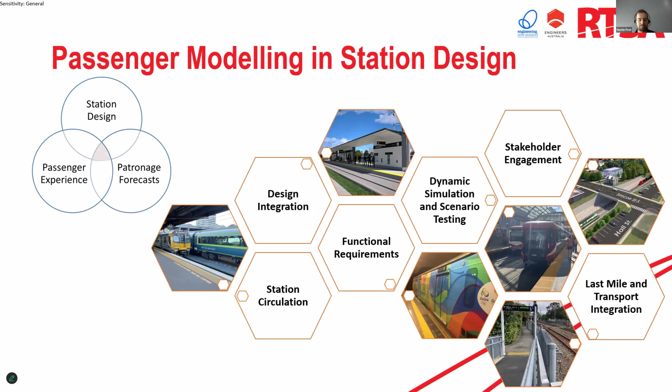Our approach to station modelling is typically around understanding the population and the user groups - developing the demands and understanding the pedestrian flows. Who's using the station? How many people are there? What are the peak times and where do they come from - walking, cycling, park and ride, and other public transport services?

An analysis in the early stages is normally used to size key internal and external elements and space-proof the design. As we increase the level of analysis, we can develop simulation models which demonstrate visually the movement through the station, circulation, and interfaces with the surrounding area.

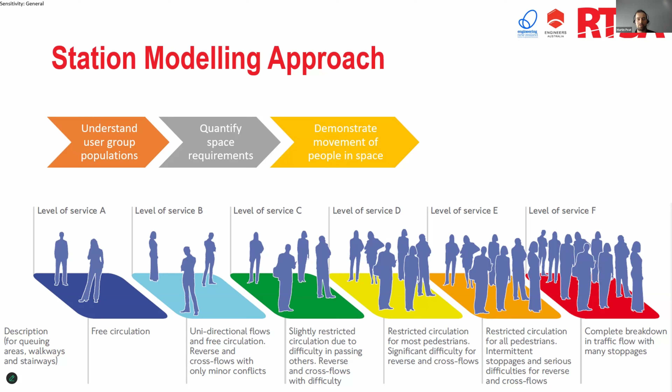Through the various levels of service, at a project level, technical requirements are specified in terms of level of service for each portion of station infrastructure, and this dictates or influences the passenger experience and safety. A caveat here is that levels of service requirements are often calculated in terms of passengers per minute, and particularly with lower train frequency, how this minute is defined can be open to interpretation. That's been one of the key findings through a number of projects.

Analysis is focused around key station elements that have a direct impact on the customer journey, and criteria for each component, and then the combination of these lead to the individual customer experience.

Scope and technical requirements for these are covered through technical guidance and station modelling parameters. For example, in Auckland, the Transport Design Manual includes technical requirements for station infrastructure, and internationally, London Underground led the way in developing standards, with most jurisdictions having some form of guideline.

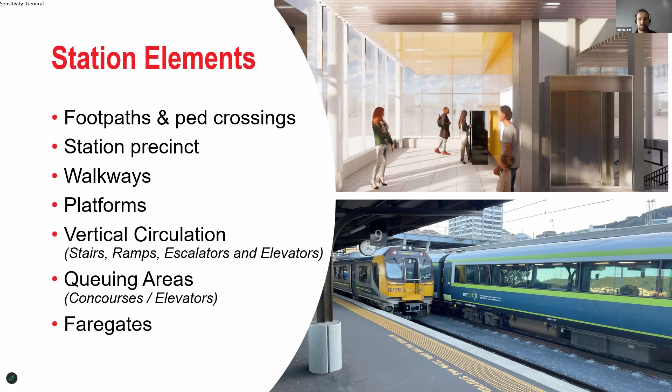I've got three case studies today, and the first is for a light rail station under the road corridor. Here a constrained footprint led to multiple iterations of the vertical transport layout with an objective of understanding how the station performance varied in each, and the connectivity between ground level and the platform for all the users, including those with mobility needs.

So here two different options are presented, option 1 on the top and option 2 below, with different escalator configurations for each alongside the set of stairs below. Each of these has had a different operational impact, including on the platform utilization and how people were distributed.

At the street level, we needed to understand the walking catchments of the station entrances and the locations of the bus services, as this dictated the movements down into the station.

What we found for the top option was that it had the longest distance travelled from platform level to the south entrance, and this was in part due to the orientation of the escalators, creating a 180 turn at both the platform level and the concourse level for all the users using those escalators.

The second option had the shortest distance travelled, because of the orientation of the escalators, but this also meant that at platform level, operational flexibility was limited, given the proximity of the escalators to the entrance, and also, down on the bottom right, the proximity of the base of the escalators to the lift bank behind.

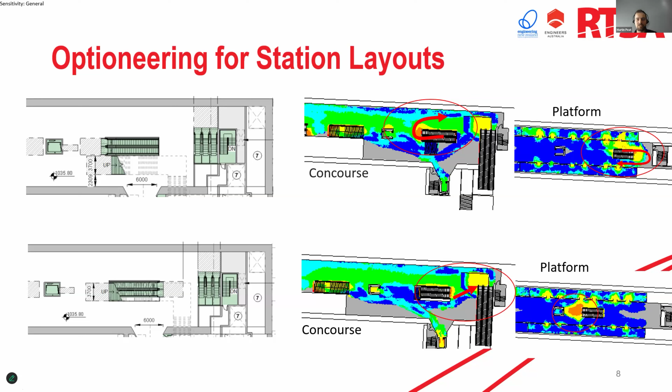Across all the levels, we wanted to understand the difference in access to the platform between lifts, stairs, and escalators. This work demonstrated the criticality of maintaining runoff areas at each of the levels around the vertical transport.

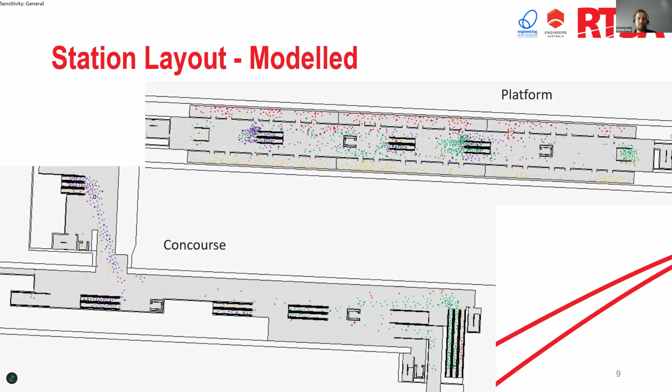Through the work, we developed a simulation model of the station, and so the next slide has a video that moves through the platform to concourse and then street level.

The simulation model captures all levels of the station as people move from the platform up the escalators, through the concourse, and out into the entrances, and likewise, people moving the other direction from street level down to the platforms.

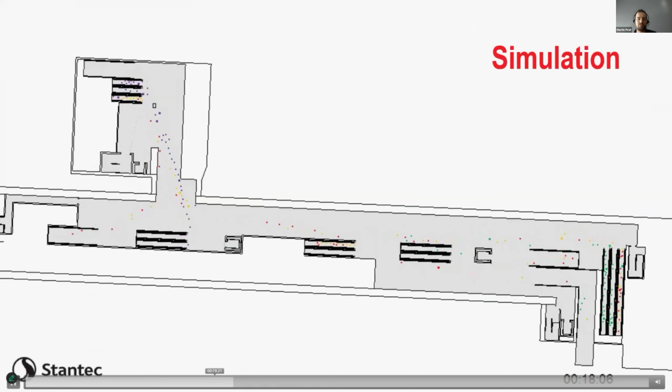Here we're able to observe and quantify the queuing at the escalators, platform clearance times, and cross flows of desire lines, and the relationship between the elements within the station.

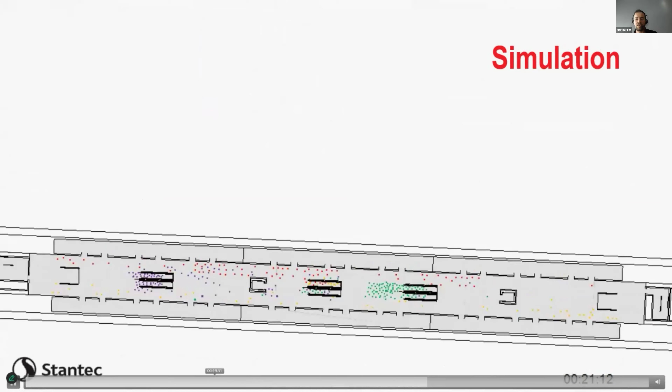The model provided a useful tool that was used to compare and contrast different options as the design detail evolved, with the aim of reducing costs for the infrastructure while enhancing the customer experience.

The next case study I've got comes from overseas in Canada, and just south of Toronto is Oakville Station. This station has a daily patronage of about 14,000 people, and it's a commuter station to the southwest of Toronto.

What we're looking at here was demonstrating the local station planning guidelines and the pedestrian modelling guidelines, which we were involved in developing. Here we were looking at the redevelopment of the interior of the station and incorporating an ancillary tenant, a cafe with significant pedestrian activity.

From the outside of the station, it was important to understand the mode split, be it the park and ride demand, public transport transfers to the bus station on site, walking and cycling connections. The current conditions had about 80% of passengers entering from the main entrance and 20% coming from the bus terminal, and this came from the mode split at the station.

We were looking at changes to the concourse area and adjusting the number and the location of the entrances inside to redevelop that space.

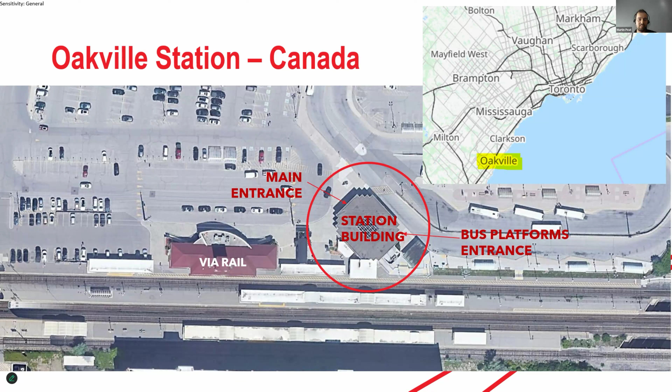We were also able to project this forward to 2040, which was our design year, with an 80% ridership growth forecast.

Typically, through a lot of the station guidance, we would be looking at the AM peak and then taking an inverse for the PM peak. However, in many cases, and this is one of the lessons learnt here, the morning peak is primarily boarding, whereas the PM peak is more spread and has a higher mix of boarding and alighting. In this case, the PM peak generated higher two-way movements.

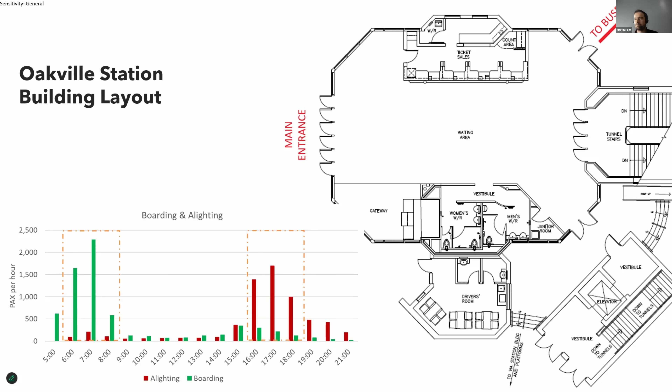Through the redevelopment work, we wanted to look at closing the entrance out to the bus terminal and putting everyone through the main entrance of the building. So here we were looking to rework the internal space and reprogram that top space for a cafe function.

In order to do this, we needed to quantify the passenger levels of service through the area and calculate the corridor width that would be needed through the station building to keep as clear space.

One of the things that we found, looking at the boarding and alighting demands shown in the graph, is how dominant the alighting demands in red are and how peaky they are after the train arrival. This meant that on average demand is low, but there's high peaks with two-directional flow occurring, as there's low levels of boarding but a big alighting load.

The variable levels of service here highlight the importance of defining the minimum requirements for levels of service: how it's calculated, the time period, and how lengths of time with no passengers are treated. The peak minute looks at those key alighting periods, whereas the average minute is spread over a 15-minute period, really emphasizing the different metrics and different ways of interpreting levels of service.

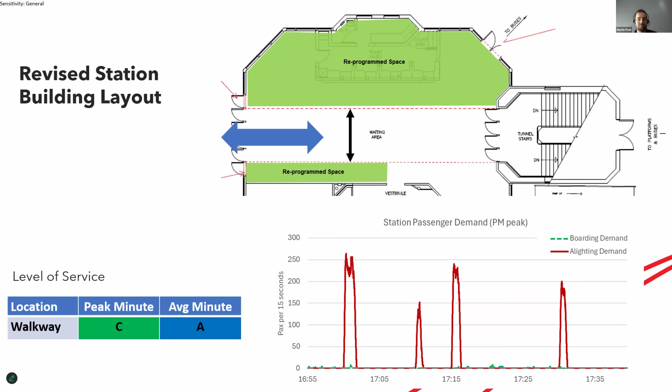A secondary task was to assess the food and beverage offering and identify how much space was needed for queuing there. Combining that with the clear width needed through the station allowed us to influence the design.

So this example demonstrates the need for localized data to inform the analysis and an understanding of train service patterns and future growth. And then we're able to develop a plan of how to maximize the internal footprint.

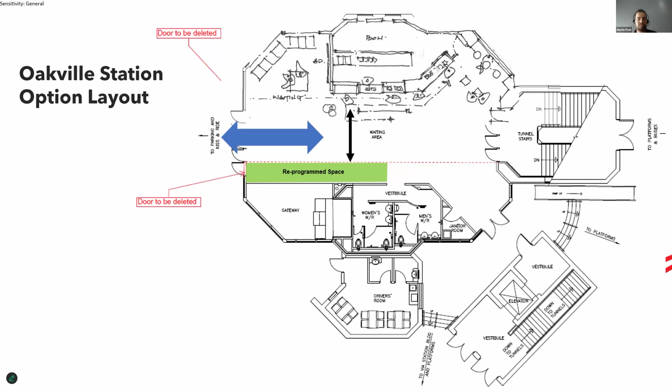My third case study is taken from Brazil, at Deodoro Olympic Park, located on the main rail line outside Rio, where a series of venues were co-located. The main access to this series of venues was through a single rail station.

The key part of getting people away at the end of the day back to the train station was egress, often with events having finish times that coincided. So that's a large number of people to get away to the station and out back to the city centre.

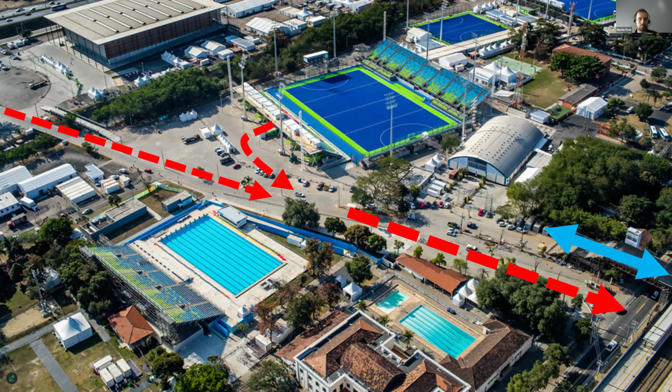Vila Militar Station has a side platform and an island platform. With the city-bound platform being on the northern side, we're able to facilitate direct access onto the platform from the venues located to the north.

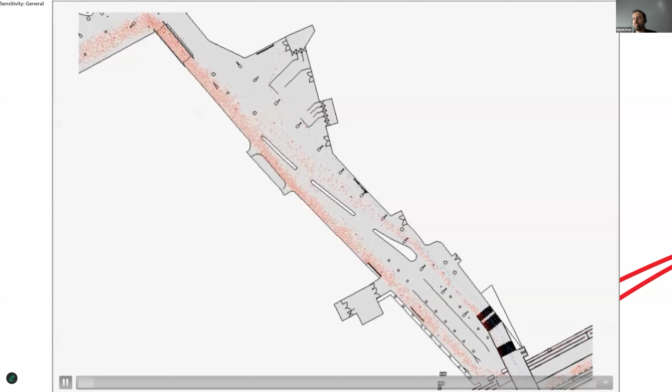Through the planning and operational phases, we're able to firstly make a plan and crowd model the people leaving the venue, with the dots representing individual people moving.

Here we needed to understand the station demands from the venues and also the station operations. This included the line loading to understand available capacity that would come through on each individual train. From here, we were able to work out how to load the platform within the headways between trains.

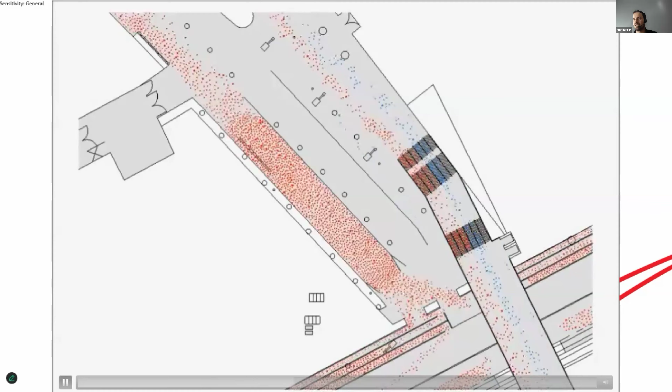This included access to the platform and staging of spectators using holding pens to match the capacity.

These simulations were essential in the stakeholder engagement that we needed to do, with the local landowner, local councils, and the rail operator.

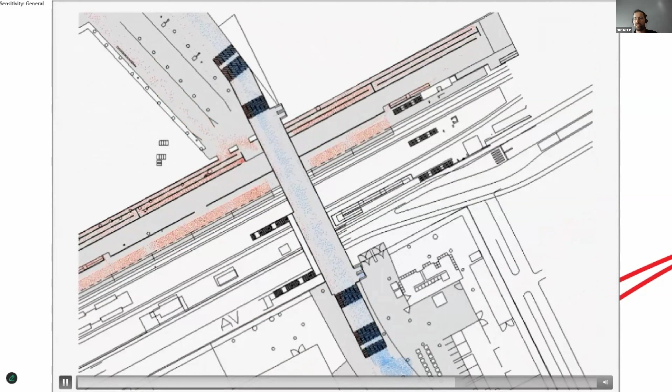And the tools that we developed and presented, we used to help train the venue teams in how the operation would work.

One of the neat things about this was seeing it live and in operation, and the success of the system and the plan that was developed through the crowd modeling and design of the station operations. Here we see videos of people being held in pens and then released through as trains arrive and capacity becomes available on the platform.

And this operation repeated night after night during the period of the games.

Through this work, a number of lessons were learnt, primarily the importance of local calibration of the parameters, acknowledging that not all stations perform the same, needing to look at the nuances and individual station-specific inputs, such as boarding or alighting platforms and how people spread along the platform. At existing stations, the splits between ramps, stairs, and lifts can differ depending on the demographic of the users, the number and location of station access points, train stop location along the platform, and the location of access modules compared to other parts of the station precinct, and where the last mile routes come in and the different modes.

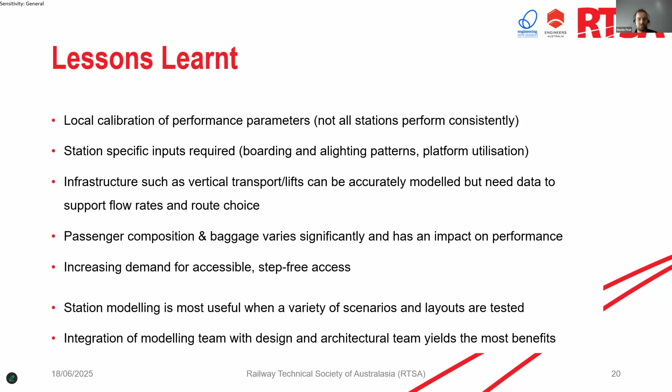Thanks, Martin. That was a great presentation. I am Louise, a Senior Landscape Architect and Crime Prevention through Environmental Design Practitioner.

I've recently completed assessments on urban design projects, bus terminals, and a railway station upgrade. So what is CPTED? Problem seeking before problem solving. CPTED covers a wide range of crime prevention strategies. The following presentation will focus on station design and the transitional environment to railway stations.

When undertaking a station assessment, four main questions should be asked. What are the assets, persons, places, information or property that require security protection? What are the criminal or other threats, street crime, terrorism and or sabotage against which the assets must be protected? What are the vulnerabilities of the assets? What are the countermeasures required to mitigate the threat?

In the midst of project demands and deadlines, sorry, the screen's not taking over.

In the midst of project demands and deadlines, it is important we remember that not everyone we design for is like us. This is a typical commuter scenario for a range of people within our community on any given day in any given part of the world. There is a range of people from different backgrounds who have different physical and cognitive abilities.

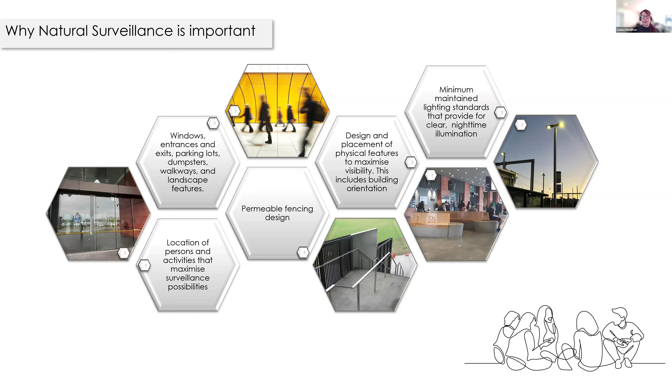Streets for Girls is a concept focused on creating urban environments where women and girls feel safe and empowered to move freely and participate fully in public life. This involves addressing safety concerns related to street harassment, violence, and lack of access to transport, employment, and recreation.

University of Queensland studies show that 1 in 2 women do not feel safe walking alone at night, and that young women are frightened for their physical safety. Recent media has highlighted that many women feel unsafe about or avoid nighttime or early morning outdoor exercise, which poses potential health and wellbeing implications.

Feeling unsafe in public spaces at night is not exclusive to women and girls, but there is focus on this group because of the alarming statistics around women feeling unsafe and because of their vulnerability.

Simple design modifications, such as more people, lighting, less noise, more security cameras, and less vegetation would make this group feel safer in public spaces. Areas can feel warm and welcoming with art installation or nearby cafes providing good passive surveillance and suitable lighting styles. It is critical when undertaking public space design that we think of the end users, which aren't always like us.

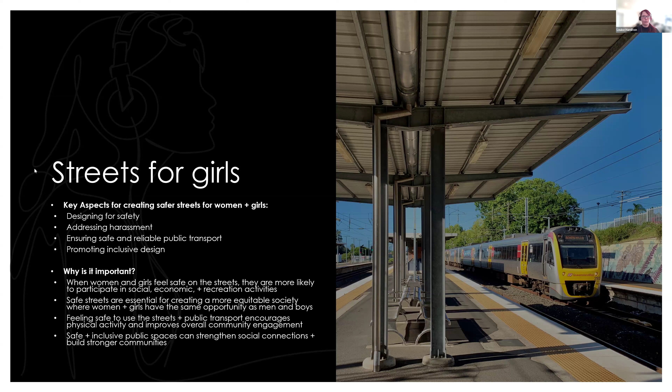These images are of an existing train station where several unintended entrapment areas were found in multiple locations. Reading from left to right, the opaque partition screen layered with large graphics of the station shelter prevents passive surveillance into and out of the seating area. This has created a dangerous concealment area where legitimate users can be attacked without being seen.

An electrical cabinet is located in the center of the waiting area. The solid partition allows illegitimate users to conceal themselves and ambush legitimate station users.

An obvious solution for infrastructure placement is not always the safest. These cabinets have been installed directly in pedestrian accessways or directly beside them. All of these structures are large enough for illegitimate adults to fully conceal themselves and ambush unsuspecting station users. The security fencing creates an additional mechanism for further entrapment in this instance, as it creates another barrier for escape.

Locating the structures within the gardens with the door opening parallel to the footpath or fencing would mitigate this hazard.

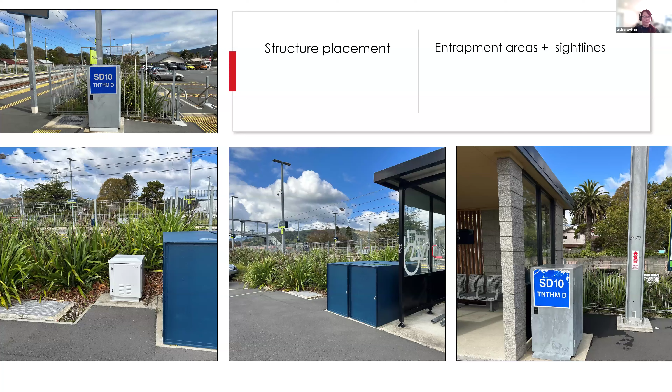The lights at this train station are connected to the street lights, which come on approximately 6:12 p.m. after dusk. The lighting came on 10 minutes apart on opposite sides of the train tracks. The lack of independent security lighting created a hazard for station users through a lack of clear sight lines and low light conditions, particularly those with low vision.

Both the car parking and footpaths were poorly lit. Parking facing into the station had their own lamps. Street-facing parking was lit by the street lamps, which did not adequately or safely illuminate the space. The absence of an intentional lighting design created concealment and ambush areas throughout the car park, particularly besides vehicles, fencing, and vegetation. Station lighting should run on its own circuits with a backup system.

The light should be turned on prior to dusk, ensuring clear visibility is maintained for station users 24/7.

The cumulative height of the vegetation lining the station accessway exceeded 6 foot. There was enough density to create multiple concealment and ambush areas. This could have been mitigated by a more tailored planting approach, ensuring the use of low-growing or staggered vegetation only. This is the image on the top right.

Inappropriately used vegetation beside pathways create concealment and ambush areas. Vegetation beside pathways should maintain clear sight lines between 700 millimeters and 2 meters from the ground. Unmaintained landscape areas with vegetation encroaching over the footpath create trip hazards. Planting should always be specified in accordance with the site conditions and constraints.

Unresolved areas within the built form create opportunity for antisocial behaviour such as graffiti. Increasing sightlines, surveillance systems, and access control would mitigate this behaviour.

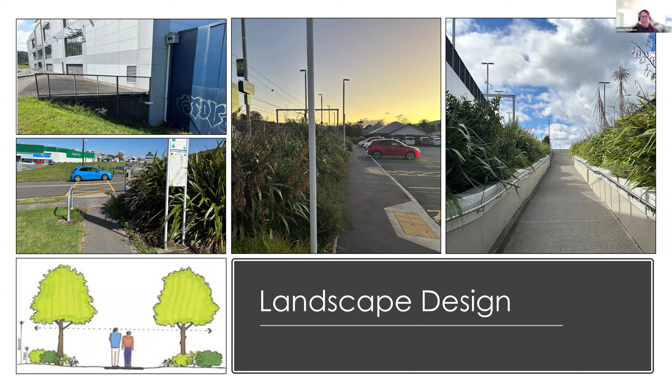This is an example of a connecting pathway from a residential area to a train station and is well used by the residents during the day. The project scope included an upgrade to the entry of this pathway as it connects to the train station, but not the remainder of the path as shown in the images.

Wider connections to projects are just as important as the projects themselves. As you can see from these photos, this pathway has insufficient lighting and overgrown vegetation, impeding light splay and creating shade and shadow. The shade allows moss to grow, creating a slip hazard, and the shadow creates numerous concealment and ambush areas along the pathway. It was recommended the local council either decommission the pathway or include it in scope to ensure users are not being put at unnecessary risk by design.

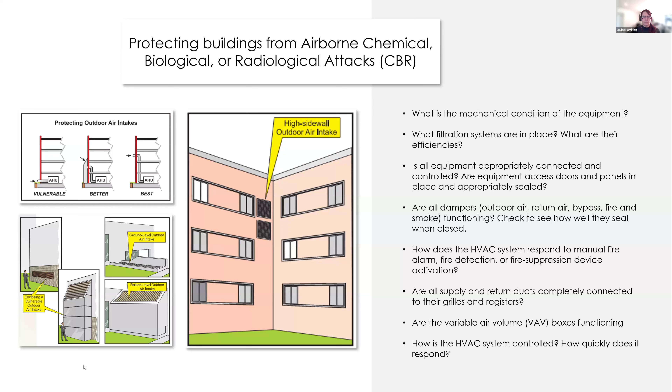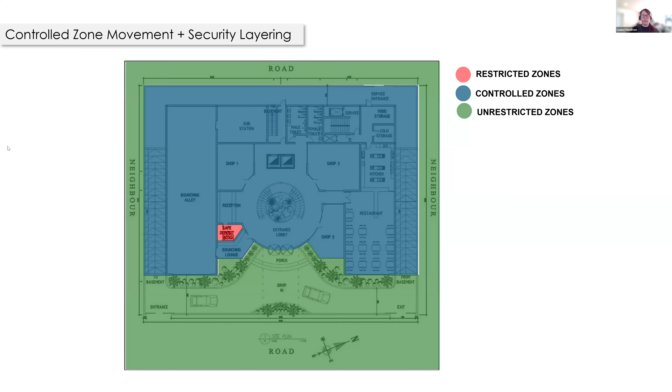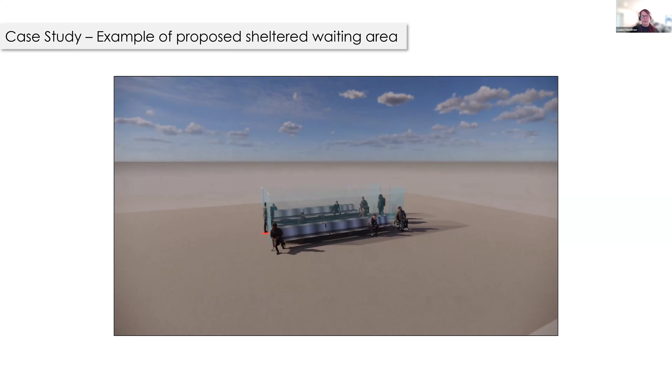This proposed train station waiting area is a graphic representation for a project currently in the design phase. The glass walls allow visual permeability and passive surveillance. However, there is only one access point at each end of the shelter, which creates an entrapment area if access points are blocked at each end. These openings measure 1.2 metres wide.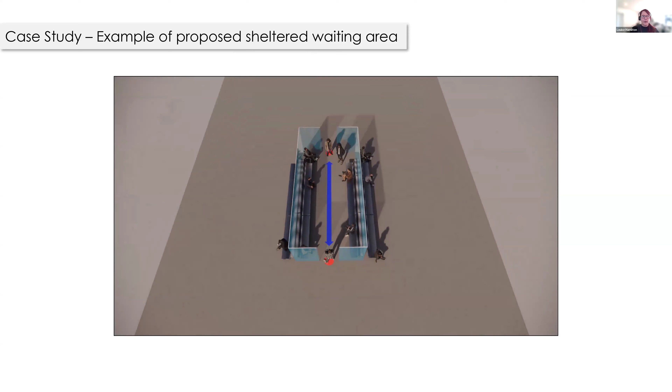It was found during a CPTED assessment of this project that the waiting area could be blocked by illegitimate users and entrap the legitimate users inside, creating an opportunity for antisocial behaviour or terrorist attack and harm to those inside.

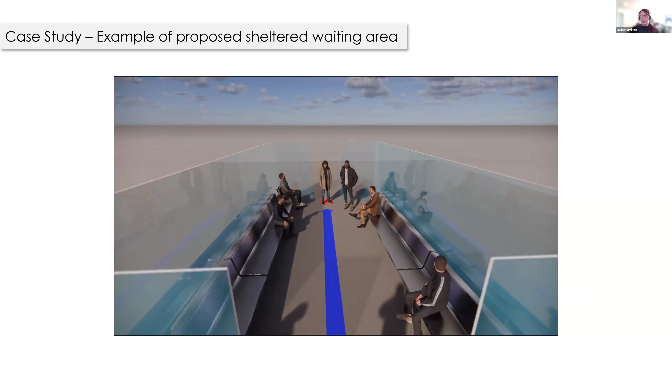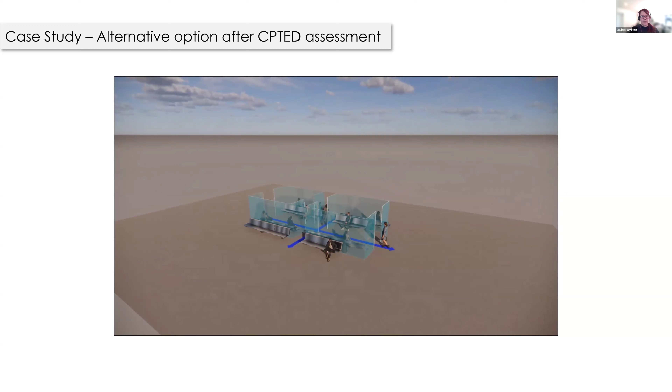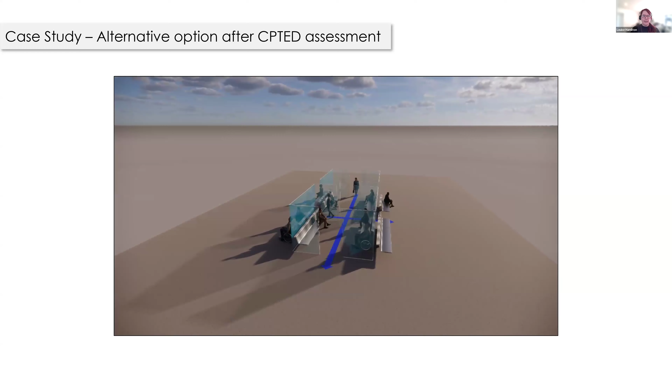An alternative layout for the design shelter was proposed as shown, where additional access points have been created, which allows better pedestrian permeability throughout the structure. This layout decreases risk of ambush, antisocial behaviour, or terrorist attacks for legitimate station users.

Rail transportation has joined the list of what is considered critical infrastructure and is one of many known terror targets. This list is compiled from train, carriage, and station attacks over the last 20 years. It is not exhaustive. The numbers shown here are only some of the extent of injury and fatality that has occurred in public rail transport systems.

The sad fact is that most emergency plans prepare for a response during or after an attack has already occurred. Very few critical infrastructure and protection models are available for anti-terrorism prevention. This is why applying CPTED principles such as controlled zone movement, security layering, space hierarchy, infrastructure protection, access control, and defensible design should all be incorporated into train station design.

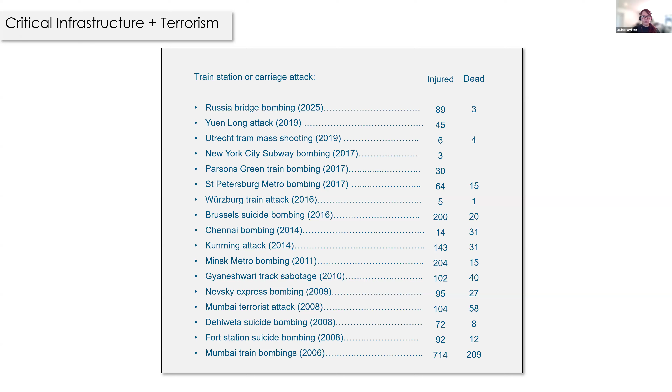Since different hazards have conflicting requirements on a facility, it is important to know and understand potential design conflicts. Conflicting demands can result in an unintended lower level of protection.

Know your political support. Most communities have learned that success of good design hinges on political backing. Seek community acceptance and support through clear communication and engagement strategies. Community buy-in is critical for project support and success.

Cost: engage technical experts from other disciplines early. Save design budget through early communication, avoiding rework late in the project. Know your available financial resources.

Is the client funding this project aware of all design implications prior to inception? Are their expectations realistic relative to actual requirements? Are you familiar with governing legal authority documents? Are you aware of the whole cross-section of people that your design will affect? Are you aware of the existing environmental sensitivities, and do you know how to respond to that?

Do all relevant disciplines know they should be involved? We don't know what we don't know. Reach out to other disciplines for feedback early. Is the client aware of lifetime maintenance and operation costs? Be organised and involve other disciplines from project inception.

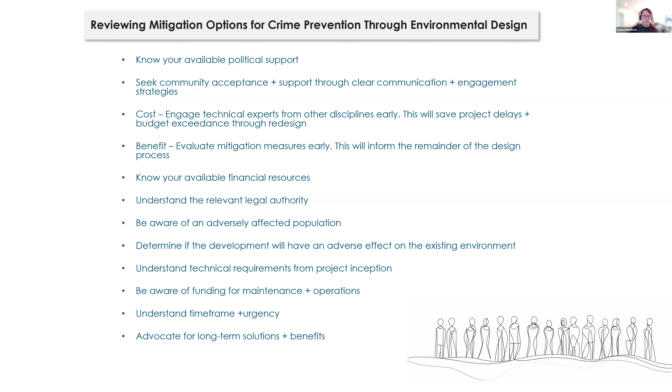So ideally, we'd be looking for survey data at an existing station or at a similar location on the network. And this could include counts of people using stairs, ramps, or lifts. And it could be by means of video footage if that was available.

And in lieu of available data, there are some other sources. For example, Transport for London have guidance for a range of station types, and this includes the likes of wheelchair users who would always use lifts and can't use stairs or escalators, people with permanent or temporary physical mobility impairments, so the likes of walking sticks or guide dogs that would have a preference for lifts but can use stairs and escalators. And then we look at things like people with heavy luggage or large luggage, and adults with young children who may or may not have a pushchair, and most of those would have a preference for lifts, but they could use stairs and escalators.